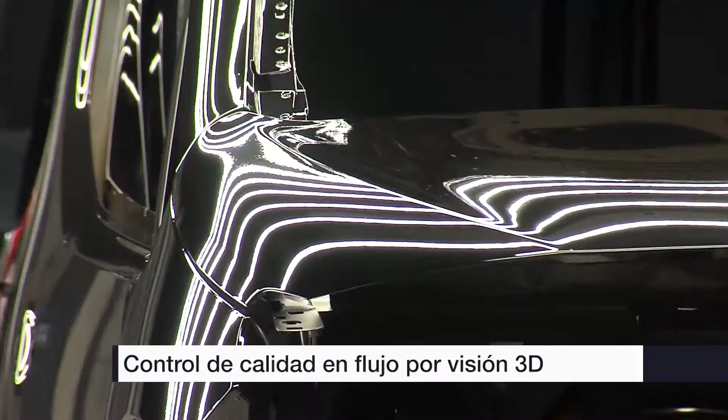And well, with more than 60 years of activity, Vigo factory is an efficient production center with 500,000 vehicles produced a year. This means more than 2,000 cars a day with a particularly high diversity of models and brands. Yes, Vigo has two assembly lines. The first line was introduced in 2008, and produces two models of the same vehicle under two brands.

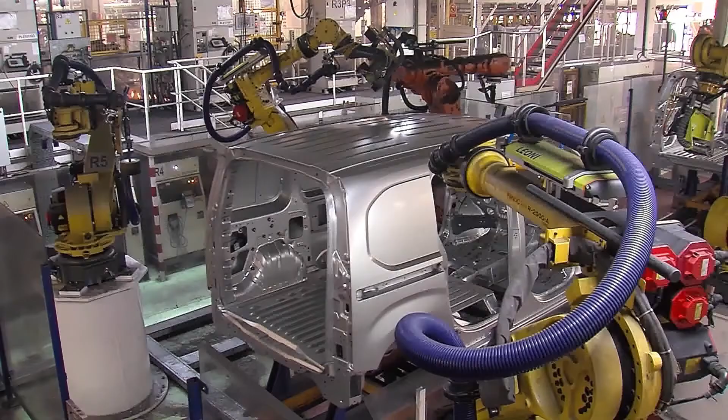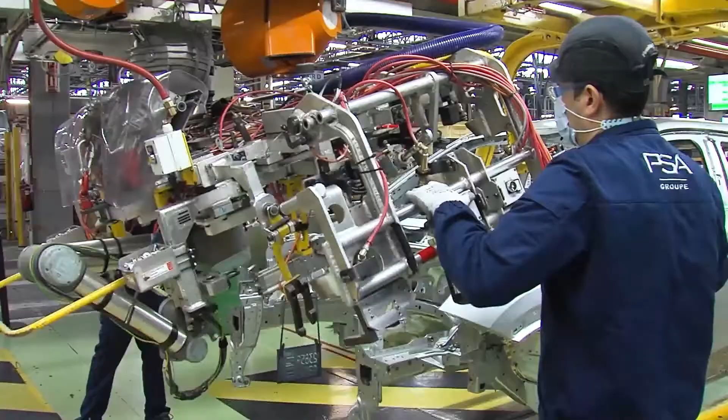301, and the Citroen one under the same model, and line 2 produces all the little vans, like Peugeot Partner, Citroen Berlingo, Opel Combo, Vauxhall, and also Toyota Proace, and the Citroen SpaceTourer, that is a family car. That's a huge amount of brands and models.

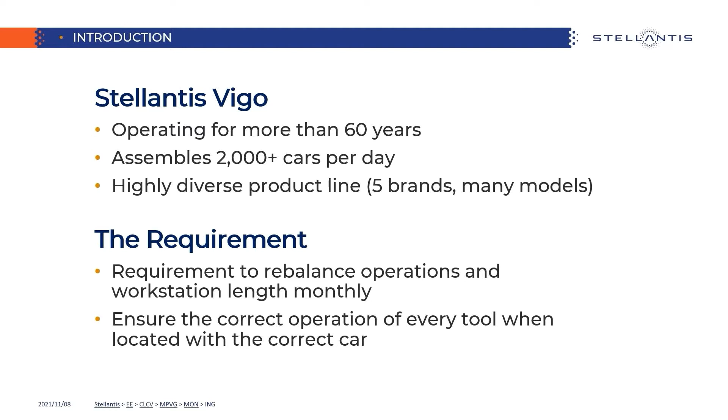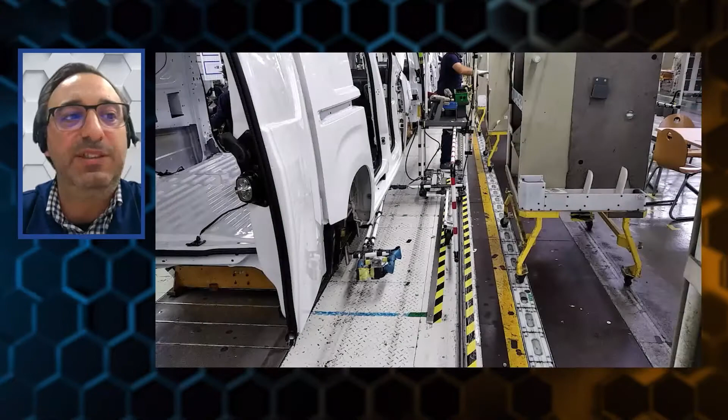And this makes for hard work in each of the two assembly lines, needing to ensure the correct operation of every tool when it's located with the correct car. In terms of tightening, with more than 500 tools working at a time, before the arrival of the Ubisense technology, we used to develop different solutions with a few mechanical and some digital elements to limit the operation of the tools, like that metallic plate that you can see on the floor that is detected by an inductive sensor. It's like a chain for a dog, that cuts the permission for the tool to work.

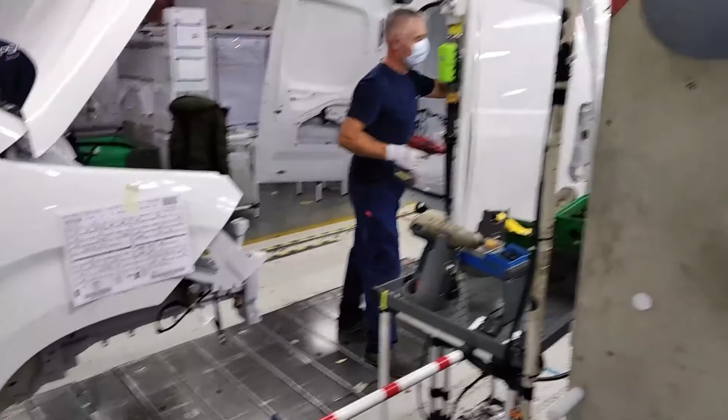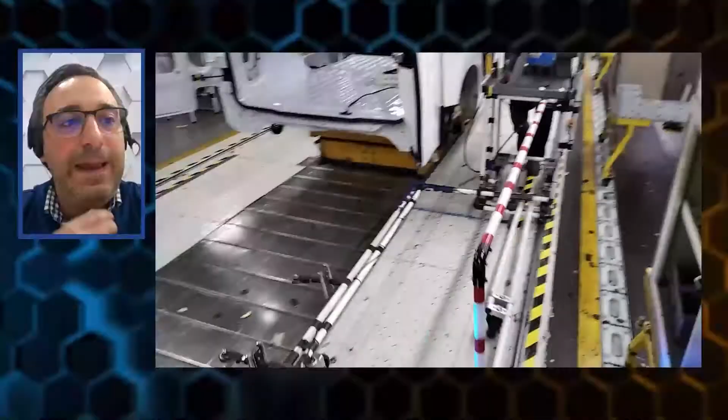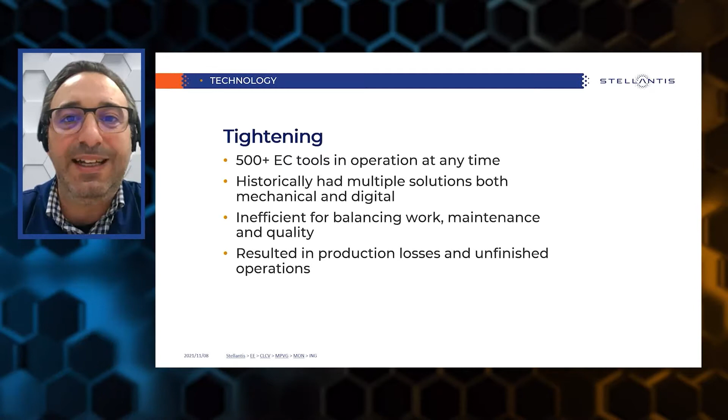With that and the photocells that we had in the bars all around the chariot, we can detect the car, and we have an idea of where the tool is. That is the main work for us, to know where the car is and where the tool is also. But that was inefficient in terms of balancing work, maintenance, and above all, quality and production. A lot of non-finished operations were detected by quality systems.

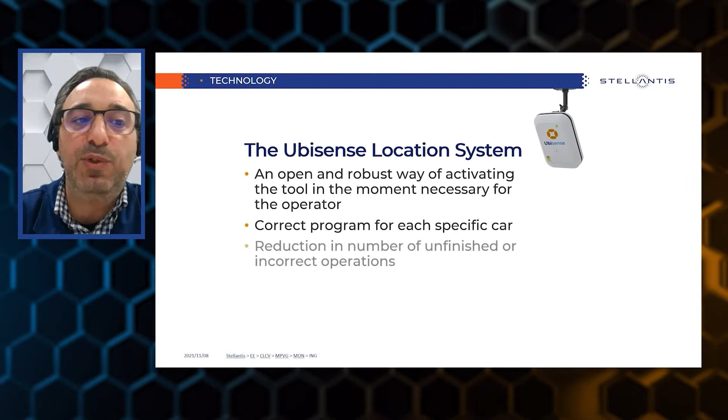With the Ubisense location system, we're able today to get our tools ready just in the moment we need to, with the correct program for the car we need to work on. This meant an important improvement in the time we spent on rework due to the reduction of the number of non-finished operations.

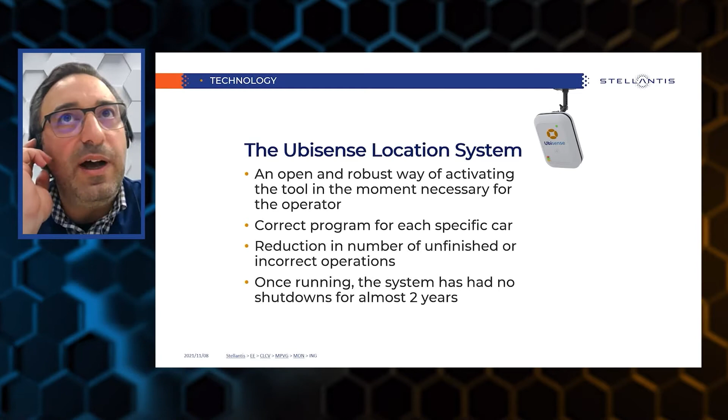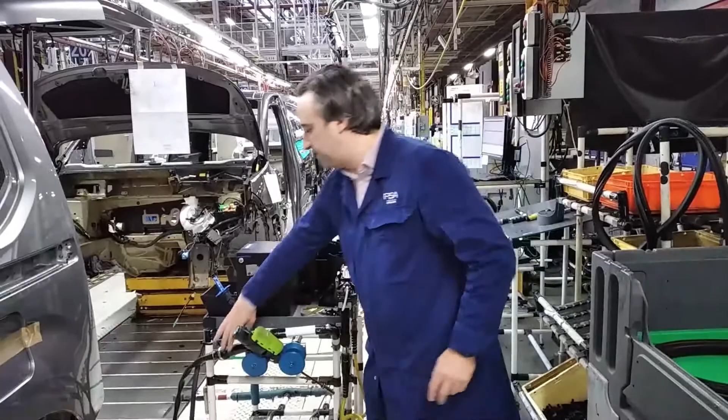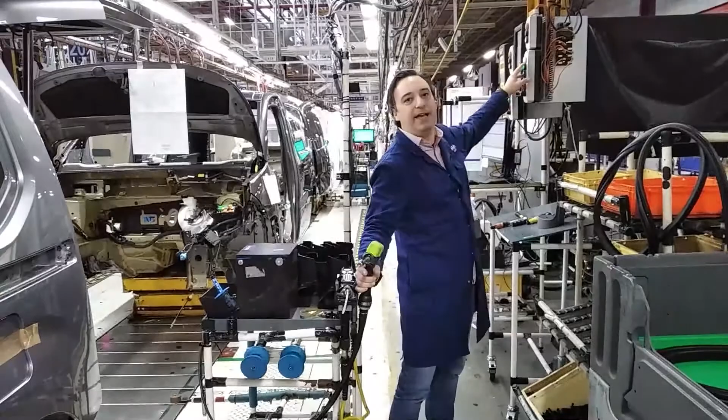Okay, now I'm going to show you a video that is a take on the assembly line where I show you how the system works. And well, that's me in the assembly line. That chariot you see is where it carries the tool. The tool is not ready to work, and there is a white light that shows if the tool is ready to work. Because the tool is outside the area of the car, it isn't ready.

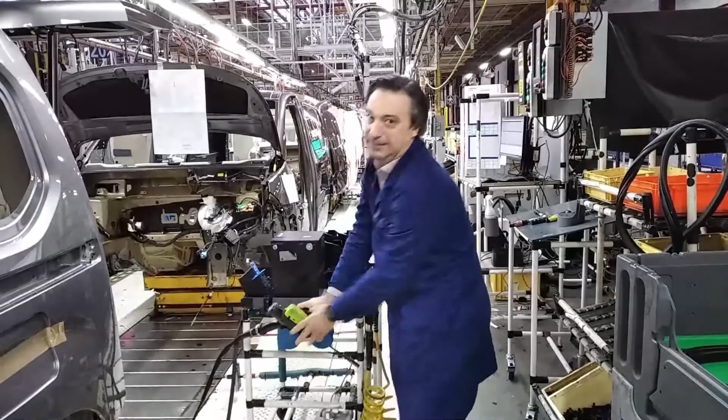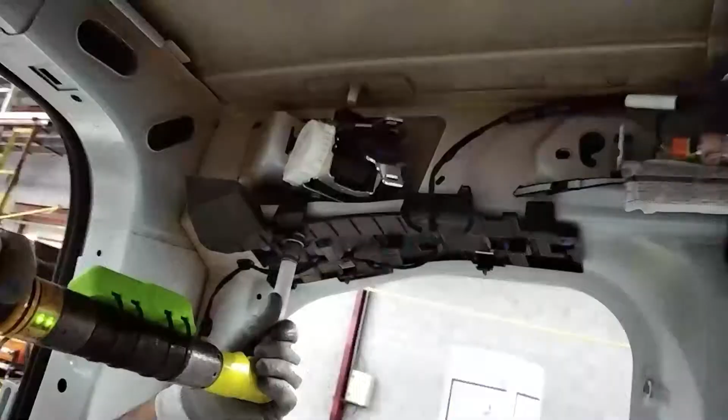Now it must be ready. You can see the light turning on, and the tool is ready to work with the correct cycle for the correct car. Every car needs a different cycle. If I go out of the area, it's a virtual area that goes with the car, then the tool is off, and you are not ready to work. That's a tightening operation of a security belt.

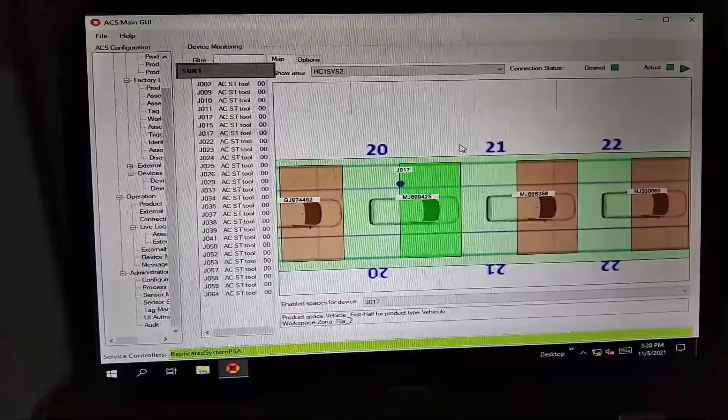The green cage that you see attached to the tool is the Ubisense tag. And that's what the system sees as I work with a tool and with a chariot. The red point turns green when I'm inside the area, as the tool gets inside the area of the car that we need to work on, and if it goes out, it turns red, which means that the tool has no permission for the operation.

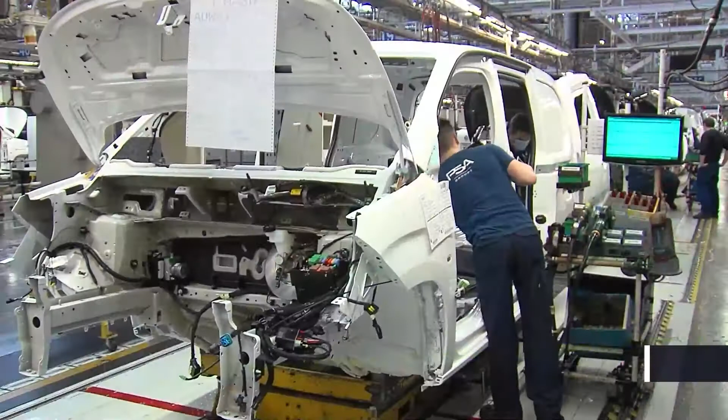With Ubisense, you can work wherever you want. If you have some delay on your operation, you can accompany the car, and the tool is ready all the time that it's near the car.

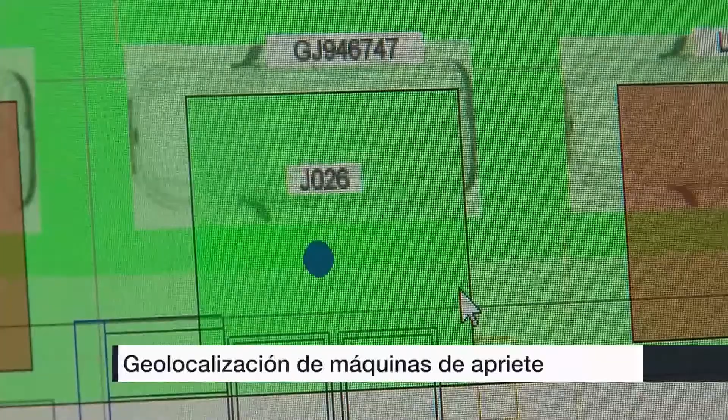About lessons learned, our first lesson learned is probably to be sure that your objectives are clear when you install this product, because there are a lot of services that the product can give, but not all of them are useful for every situation. We were clear on our goal to improve the non-finished operations number, meaning a big improvement in time needed for the product rework.

The second one is to be sure that the rest of your systems are profitable, because you can earn some budget taking advantage of every system that already exists. In our case, the information of the encoders that we had already gave us the position of the cars, and we saved the cost of installing Ubisense tags in every vehicle.

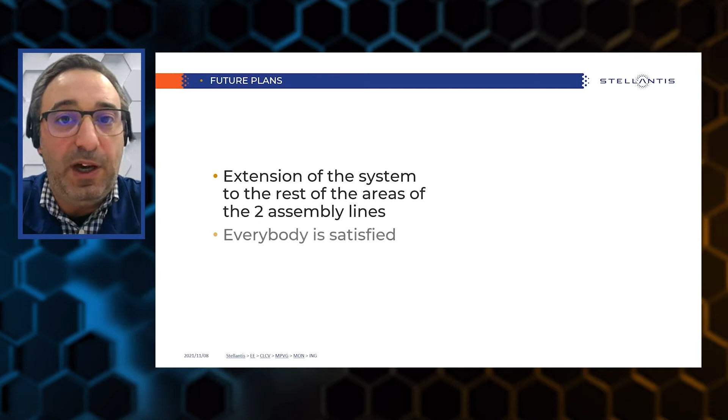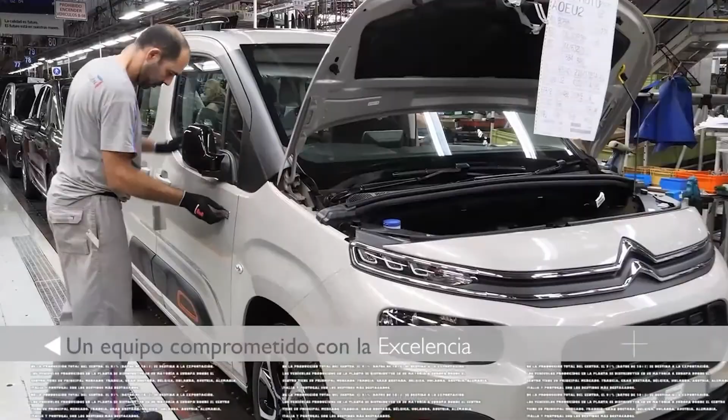For our future plans, if everything goes as expected, we're going to extend this type of system to the rest of the areas of the assembly lines, because everybody's very satisfied with the speed of the operations and the operators working in this assembly line is very high. It's a high gain of time for the company, for Stellantis.